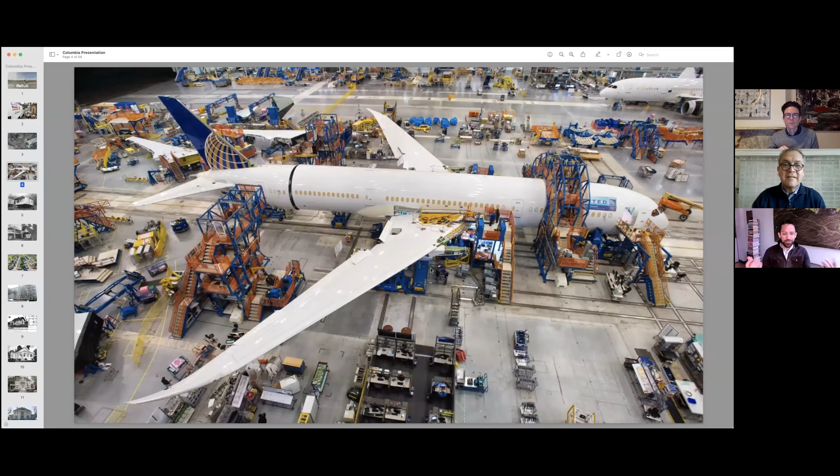Innovative building models aren't just here, they're throughout the world, trying to solve for creating place and creating home.

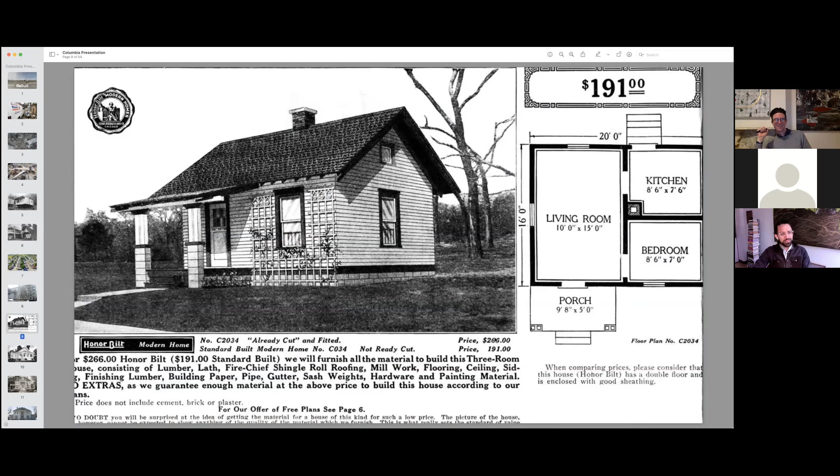Walker and I are blessed to sit here in Chicago, where Honor Bilt and econo-built Sears Homes took root and spread across the country. I do want to note, though, that even in advertising then, it wasn't actually $191. If you wanted it ready and pre-cut, it was $266. So there's always a little bit of spin, whether it was the base model, something bigger, or the Magnolia, which does still exist in the country. This one happened to sell for over $3 million. It's interesting to think about the implications of how things are built. We have this historic legacy here, and we also have this new legacy.

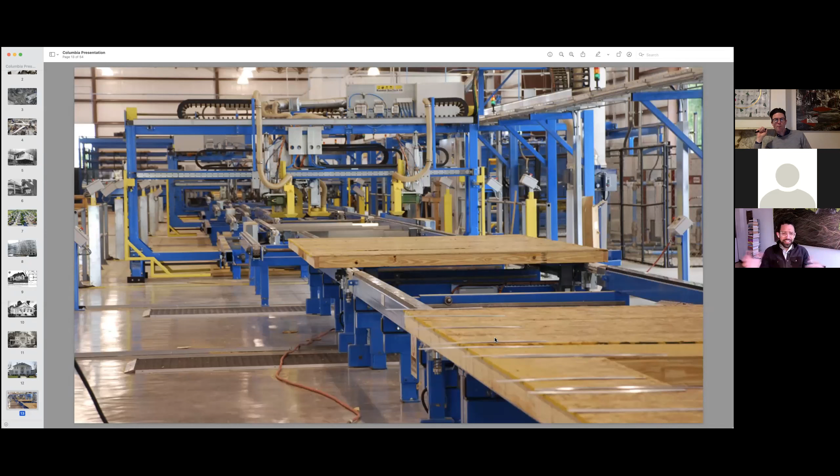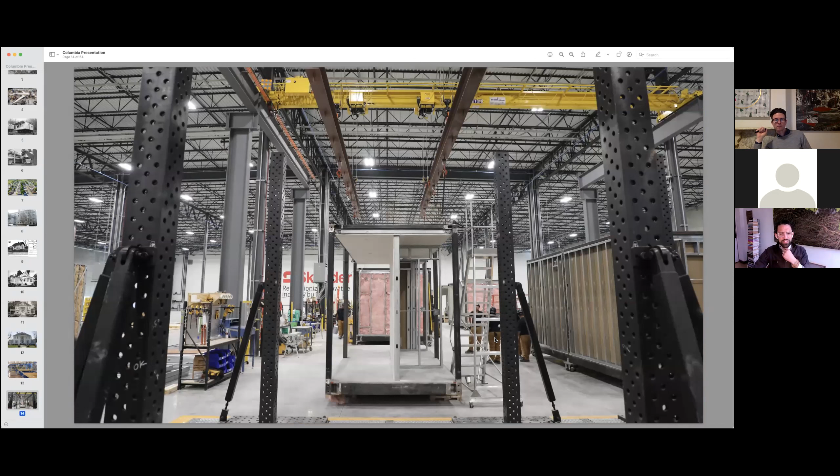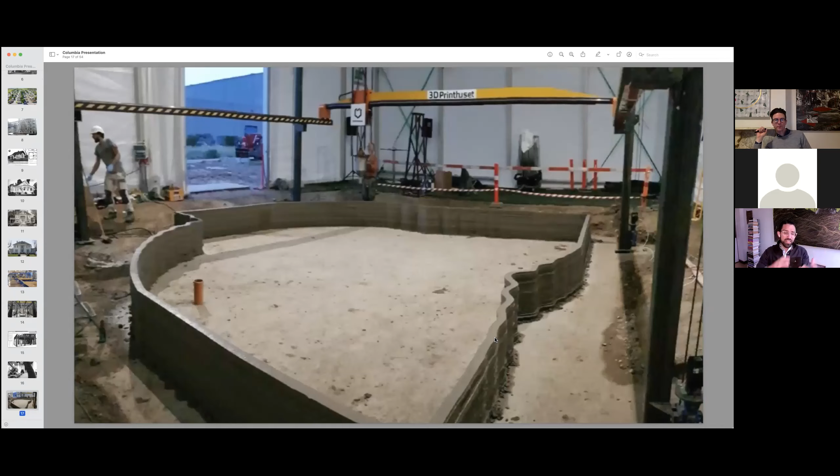There are companies throughout the world and within the United States slowly creeping in around new tools and new technologies, ways to build. In the Q&A, I'll talk a little bit about a previous experience building volumetric steel here in Chicago. Prescient, solving with new tools and technologies, 3D printing of formworks, 3D printing of buildings. Yet we still often come around, specifically when we talk about affordable and attainable homes, to implications and quality issues, when in reality we should think more broadly about that.

It's often singular. Walker and I sit actually a few blocks from each other in the West Loop of Chicago. Fulton Market West Loop is either the first or second fastest growing neighborhood in the country in any given year, a trade-off with Brooklyn, not that far from y'all. So we sit in one of the fastest growing neighborhoods in the country, and we also sit in a city that generally loses population every year. So we have this duality between innovation, energy, and investment, and also that missing gap and missing challenge.

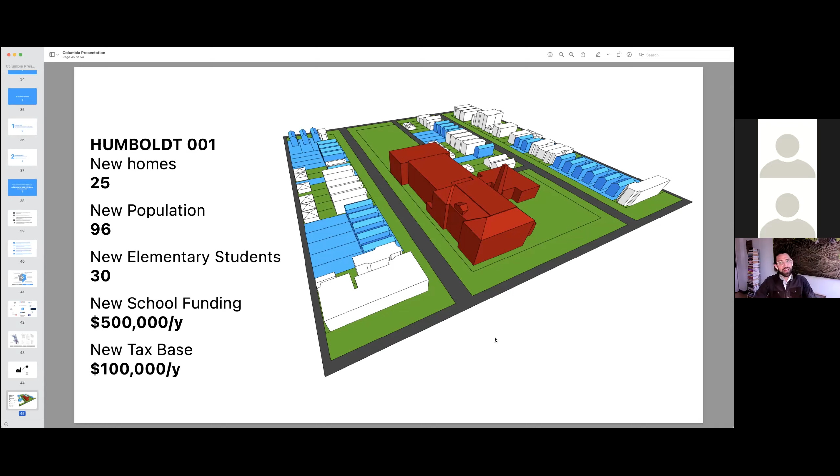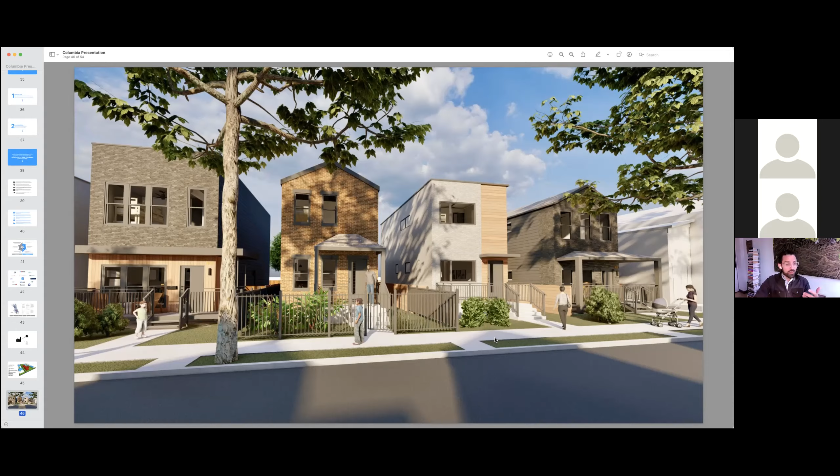So when we think about that shift, we think about it in this broader based way. We think about what it looks like to take blocks of vacant land and provide opportunity for housing. We've actually worked directly with the city of Chicago in two different interesting ways. One is how do we solve this? And two, how do we wrest what is often infill strategies dictated from a planning department—which is really important for context and structure—but also have dignity and choice in the process, so that as we work with our buyers, they're able to choose the aesthetic of the home, the look of the home, the fit and finish of the home. As I show you these 4 renderings, and we'll look at another 4 and a whole host...

All of these, friends, the best and most interesting way to think about it: they're all identical homes from a permitting perspective. We've actually gotten what's called a prototype permit, so every one of these facades can be applied to the same permit. By self-certifying, we can get that permit within one week. So there's the ability to have a lot of customization at the homeowner level, and from a code perspective, a deep connection back to buildings, to a building department, so that we can deploy these.

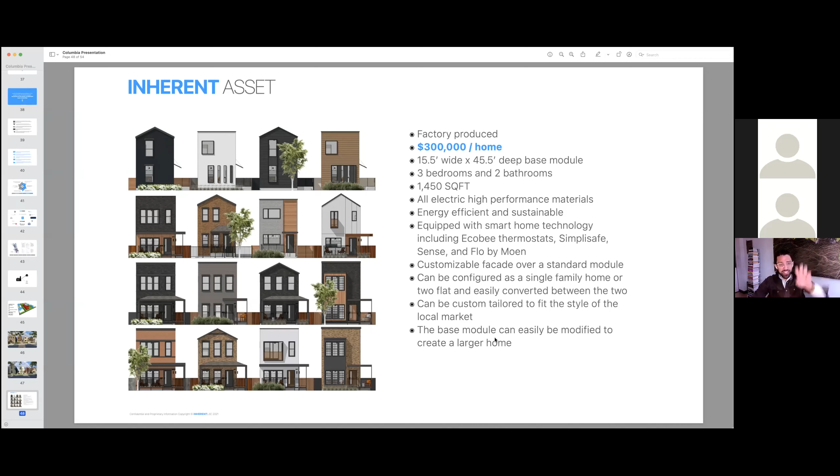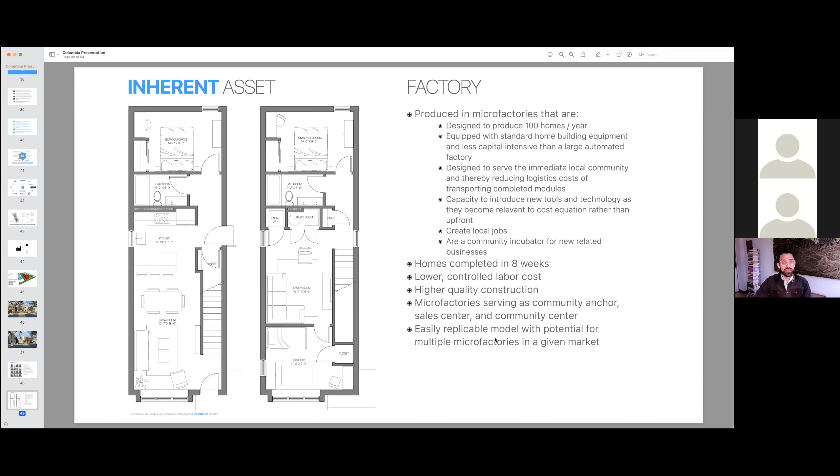We also believe that it's important to do this in a 21st century way. So it's solving for the house, solving for better structure, solving for a more normative housing unit—something that can be a single family home or a 2-flat with rental income—and then protecting that asset. That's the other half of our two-sided coin here. So it's not just building new products and getting first-time home buyers into it, but making certain that that long-term relationship builds value, builds wealth, builds opportunity.

So some of our strategic partners across the smart home spectrum allow us to do really great things. It allows us to provide 5 years of quarterly maintenance with a homeowner, because we can let that homeowner know when their pipes have a potential leak. We can solve a leaky dishwasher with a $5 part, not a $50,000 water damage claim. We can find ways that actually invest meaningfully for that homeowner.

As a company, we built a structure that we believe is self-fulfilling and virtuous. It's building more businesses. As we mentioned in the first half, there is the logic that real estate can build wealth and business ownership can create wealth. As we do that as a business, there's a host of partner businesses with us. It allows us to create more community-based businesses. In fact, our factory—and this is a lesson learned that we can dig into from my previous life at Skender—at Skender, we believed, and most factories believe, you have to own the entire labor workforce to make it work. What we found is we just have to have a strong relationship.

So our electrician, for example, in our factory and in the field, is a partner—a small minority-owned business on the west side of Chicago—who we can guarantee pipeline with, who we can workforce develop together. Our plumbing partners are the same way. Our supply chain partners are the exact same way. So what does it look like to be able to build 50 meaningful jobs as we incubate community and opportunity in every factory that we do, and 25 trade jobs that are building other businesses and scaling that up?

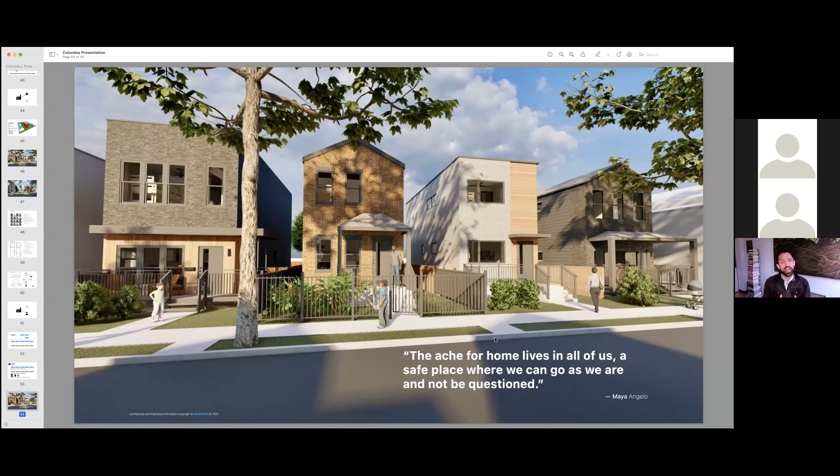At the end of the day, this is where we sit. This is that tension of what does it mean to build in a new way? And what does it mean when the building is actually wrapped by a broader strategy around meaningful financial solutions, meaningful homeownership solutions, stability in the longer term? Because as these really wonderful words frame, when we do that, we create space for life to exist—for so many of our communities, for so many people who are doing the right thing, who are working the right way, who are really trying to make that place for themselves and for their family, free of the uncertainty of, am I going to live in this place next year or next month?

The uncertainty and instability of home creates so many challenges. The ownership of home doesn't solve all of that. We're going to be really honest about it, but we do believe that it opens that tolerance window just a little bit. It gives more opportunity to think, to plan, and to dream.

So with that, I'm going to flip the share off and get our faces on the screen. And I can talk a little bit, Rick, about this path and this journey, where Inherent has come from and some of the history here in Chicago specifically.

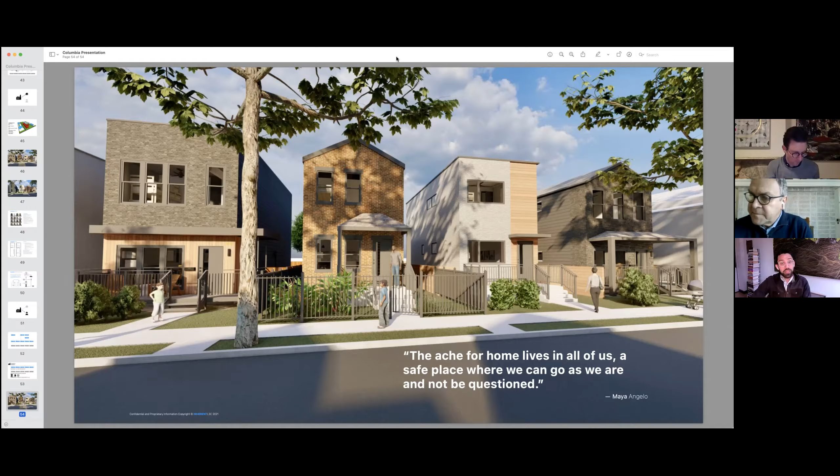Great presentation, inspirational, it takes my breath away. There's so many things that you're doing that are, I won't say unparalleled, but so valuable, and I think the discussion will bring some of those out in greater detail.

Starting with the name, I thought I knew Latin, but not every word adequately. The word inherent, it means to stick to in Latin originally, and that has to be deliberate.

That's right. You're talking about long-term stability and sticking with homeowners, not just doing a turnkey and giving the key and walking away. That's phenomenal, and so ambitious, and it must be difficult.

Yeah, in so many ways. We were talking with a group of real estate attorneys for Urban Land Institute, and the subject came up, and I said, look, if you want, we can use the legal definition because that's the safe language for everybody, but the legal definition is vested, actually vested in somebody as a right or privilege. That's important for us to think about.

Often the language is about empowering communities or structuring communities. That's the wrong language. Communities have their own power. They're just often limited by externalities. So we believe that this idea of inherency is actually our privilege when we get to vest in someone else, and it carries a heavy yoke too, just as you framed.